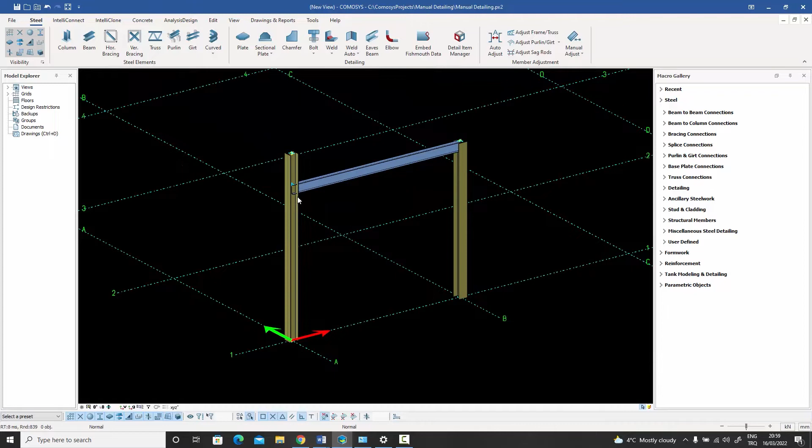So what I want to show in this video is how do we do manual detailing. So imagine I have a column over here and a beam approaching it, and I wanted a haunch connection over here, let's say. Now normally, obviously, since I have the beam to column haunch macro, I can just use that. But let's say I don't have that macro and I want to do the detailing manually myself.

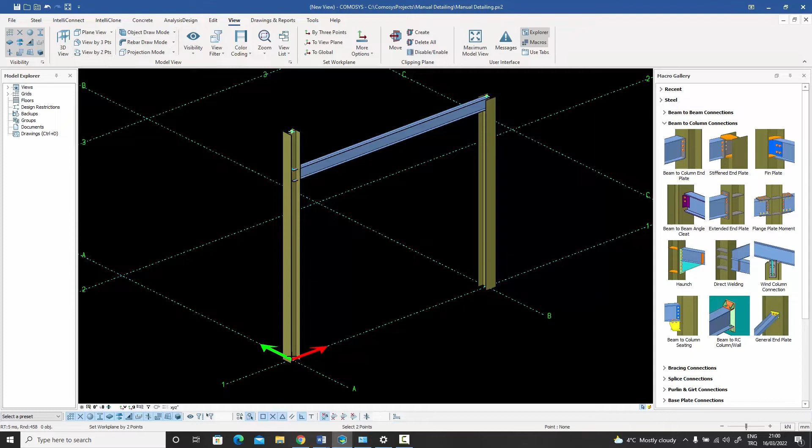Now in that case, what I would do is I would go to the view menu and I would go to the view by 2 points and I would create a view for myself. And the moment I do that, I'm looking at the elements from this side. A good practice is to immediately press this V button so that my work plane comes to this view and I know where my X and Y axes are. I can zoom in a bit and now I can start creating my plates.

So there'll be an end plate over here. I know for the haunch, it's going to extend some amount to the downside, and it's probably going to extend a bit to the upside as well. So I can go to my steel menu and I can look for my sectional plate command over here. I can press that and it asks me to select a plate, but I don't want to do that. So I'll right click, I'll just select 2 points and I want to select this point over here and this point over here, and then immediately a sectional plate is created. Let me right click twice to get out of the command.

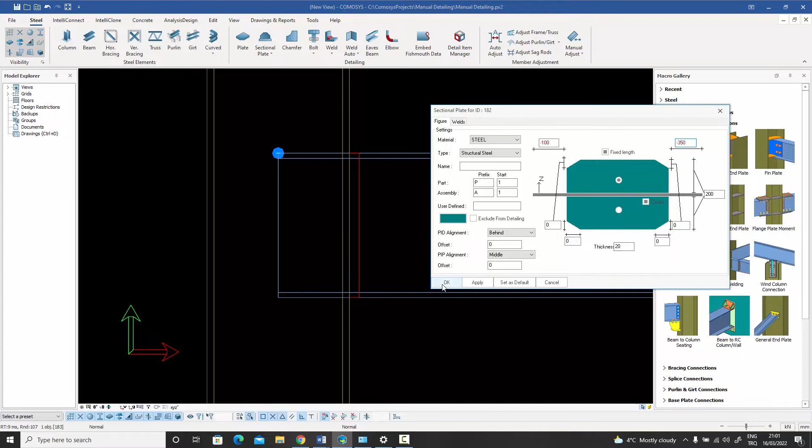Now I can select this plate and press Ctrl W to get it to the alignment which I want, and then I can double click on it and a dialog box opens up. This is the end extension and this is the start extension. So on the start I want an extension of -100. Maybe I want to put a bolt up here, and at the end, which is this point, I want an extension of minus, let's call it 350, right? And okay, so immediately the sectional plate command gives me an extension upwards of 100 millimeters and downwards of 350 millimeters.

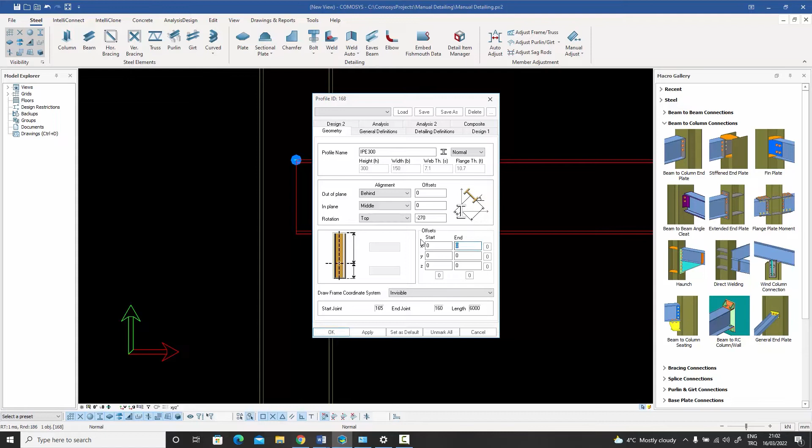The next thing I want to do is I want to pull back this beam so that it finishes at this point. So I can just measure what this distance is from here to here, and it's the next distance of 165 millimeters. So what I can do is I can just double click on it. This is the end point, so I can say minus 165 at that point and press OK, and the beam is pulled back.

Now I want my flange plate, which is an inclined plate, something like this, and I want the flange plate to start at about 30 millimeters above this point, somewhere over here, and go in an inclined way to somewhere over here, which the definition of this point would be, say, 500 millimeters from this point.

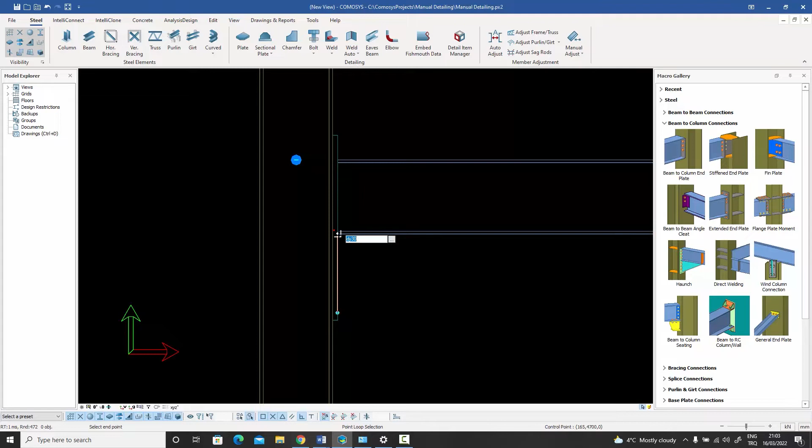So I can go back to my sectional plate command again and right click because I want to select points, and I can hover over this point, and using direct entry method I can just say dy 30, and the first point is selected without having the need to actually create the point. And for the second point, I need to hover over this point and press enter again and say dx this time and say 500, and I press enter, and immediately my sectional plate is created. I can right click twice to get out of the command. I can select this plate and press Ctrl W shortcut to get the alignment which I want.

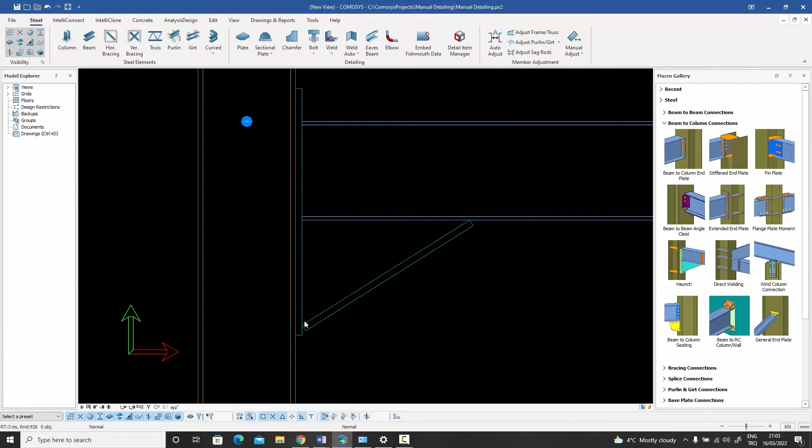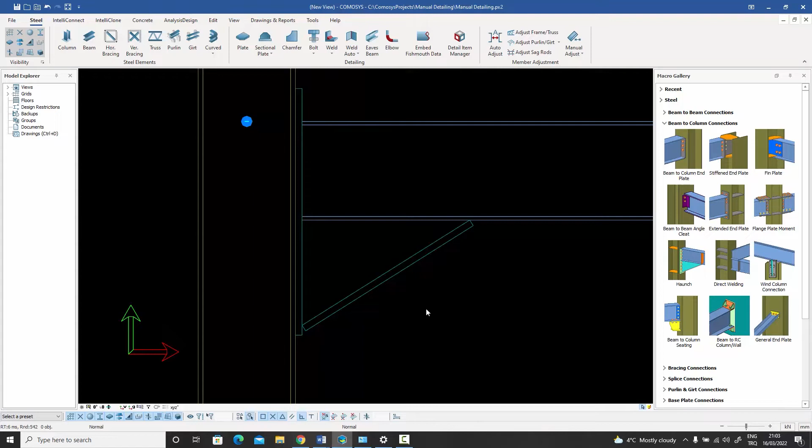And now I'm ready to enter my contour plate, which is a triangular plate over here. So for these two plates, I use the sectional plate command, but for the triangular plate, I will simply use the contour plate command over here. So I just go like that, and back. The plate's been created. We don't see it because of the mode we are in, so I can just change my draw mode to the solid draw mode, and I can now see the plates. They're all created in the center of the view, so they're perfectly aligned right now.

What about the depths of these two plates? How much are they going in the Z direction right now? So I know I want this plate and this plate to maybe be the same as the beam's flange, for example. So let me double click on the beam's flange and see that the width of the flange is 150. So if I double click on that, I can make this variable 150. And now I know that the depth of this plate is 150, and I can do the same for this one.

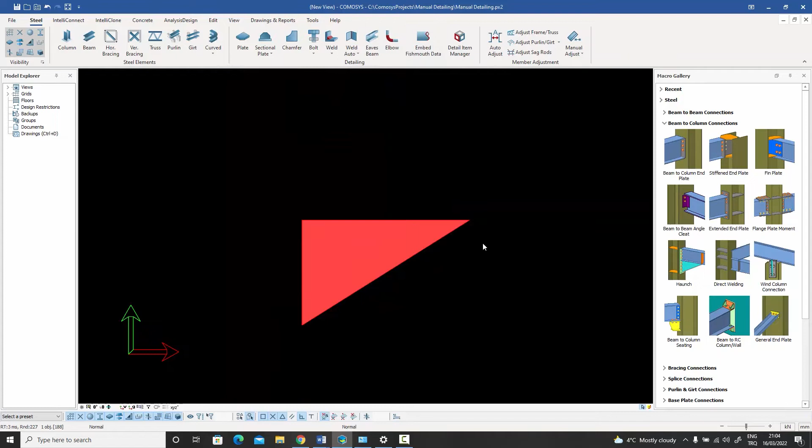I could have done a multiple selection and done both of them at the same time. Now I want to have 3 chamfers over here for this triangular web plate. So what I do is I just select it and I say show only, and I press the Alt key and I do a window selection so I can select all the chamfers, press enter and go to the appropriate chamfer type and give a number, press apply, and my chamfer is done.

I can right click and say show all once again, and the rest of the elements are on the screen once more. I now need the bolts at the end over here. So let me go to the sectional bolt command over here. The normal bolt command would be used if you were looking at this from the front, facing it. But since I'm already in the sectional view, I'll prefer to use the sectional bolt command.

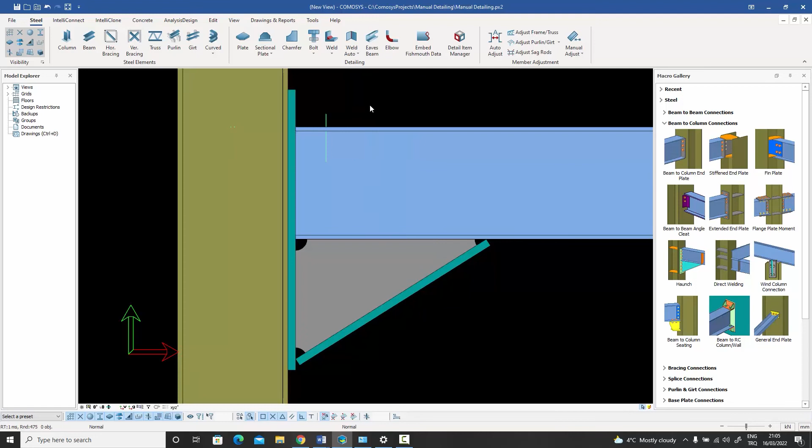And the bolt is between this plate and the column. So I select the two, right click, and now it asks me for the origin of the bolt coordinate system, which is over here. I can have it anywhere I want, but let me just keep it over here. And then it asks me for an X direction. So I give it this direction. Immediately it creates the bolts, but because the settings of the bolts are not appropriate right now, it's just created the bolts in a dummy way.

So I'll double click on the bolts, go to my positions, the Y positions. I know this is the X direction, but the problem was in the Y direction. So the Y positions need to be -30 and 60, -30 being the absolute coordinate and 60 being the relative one. And for the X one, because I know the origin is over here and I want my first bolt to be over here, I can say -50 and then 100. So let's see where that gets me. That gets me something like this. This first bolt at the top is -50 and the second one is 100 millimeters from there.

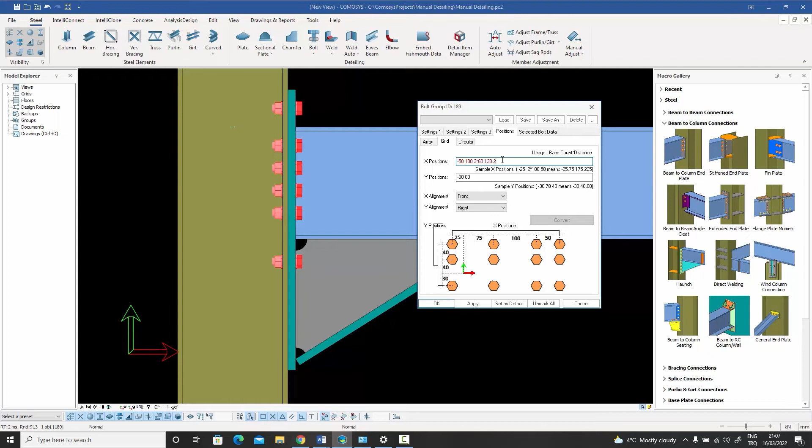And then after that, I can just say maybe 3 into 60 and see where that takes me. Okay, that's perfect. I can then jump 130, see where that takes me, and then do another maybe 2 into 75 to get my remaining bolts. And I can press cancel to get out of it. If I wanted to change the diameter, I could just go to the settings section and change my diameter and assembly settings from here, but I don't want to do that.

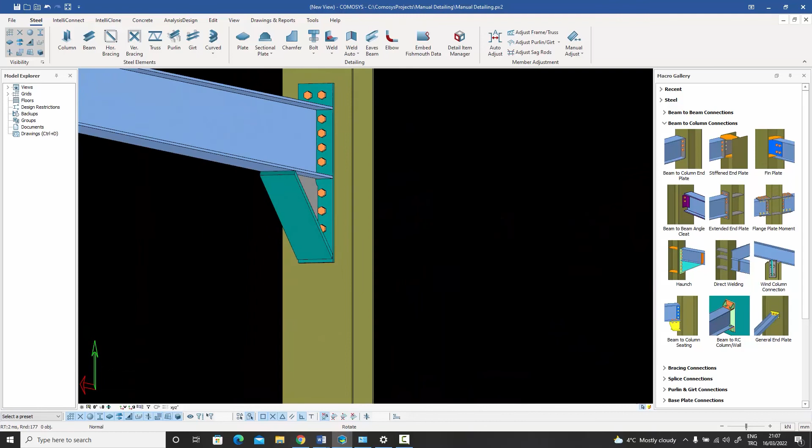Let's just rotate the view a bit and see what we've achieved. Okay, there we go. We can see that these sectional plates are exactly the width of the beam over here, which was 150, as is this end plate. And with a few clicks, I have managed to create my Haunch connection. Now I want to just create a little stiffener plate over here as well. So I can start creating a contour plate. I can go like that. I can go like that.

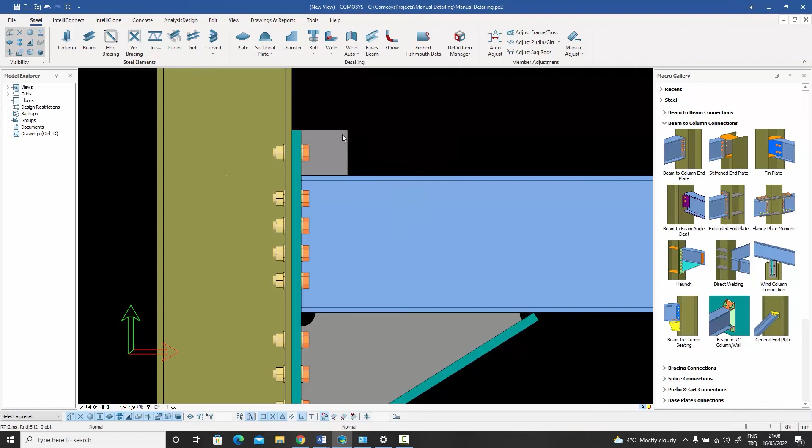And now I can hover over this point and say something like dx 100 maybe, right? And then I can just come down to this point because the perpendicular snap is there, and I can finish it off. My plate is ready. I can press the Alt key, press enter for the chamfer. If I had the handles on, I could have done it through the handles as well. So I can just go in there and say maybe 25, 25.

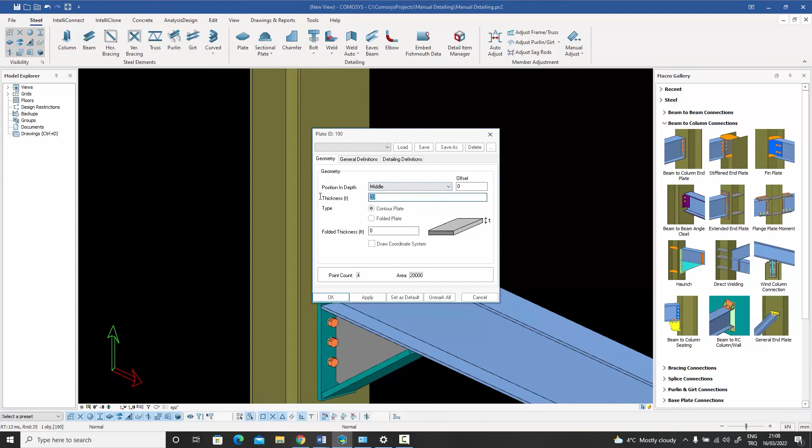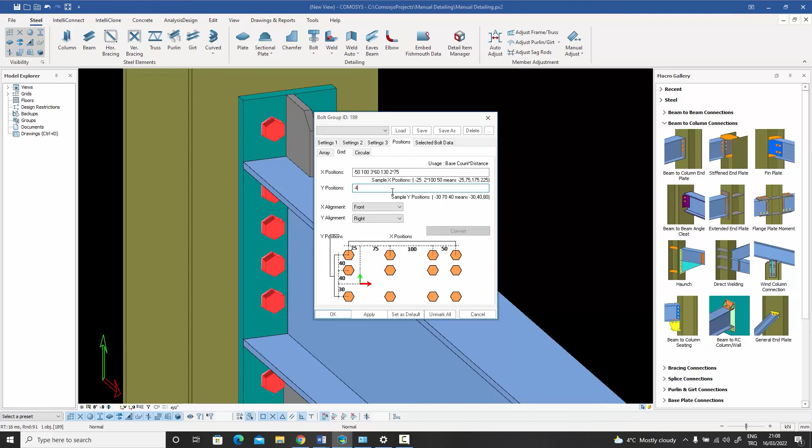That's it. And now my corner plate is also, the thickness is a bit too much for my liking. I'll convert that into 12 millimeters. And now I'm satisfied with it. I can go ahead to make the welds also. Maybe I don't like the distance between the bolts over here. Maybe it's a bit too small. So I can double click on them and, instead of giving it -30 to 60, I can convert that into -40 to 80. So it's a bit more opened up, right?

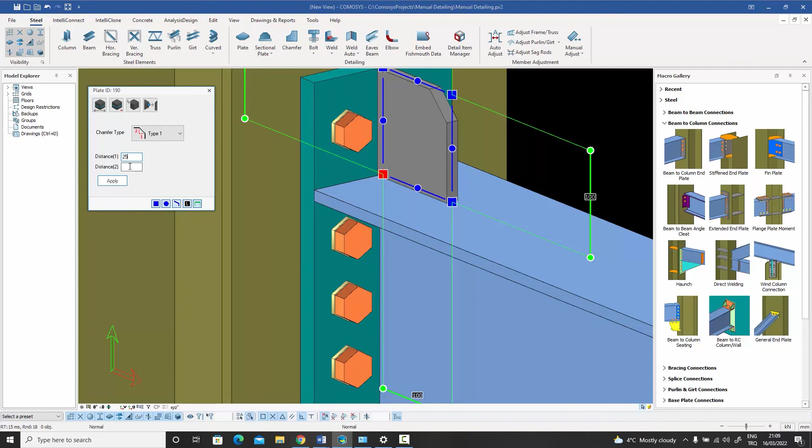I need a chamfer at this point as well. Let me turn on the chamfers. Now I can select this one and give it a chamfer using the handles this time so that it's easier. And there we go. Once again, I can press the 0 button over here to see it from the side, and I'm satisfied with it. All that's left over here is to create the welds, and that's pretty easy as well.

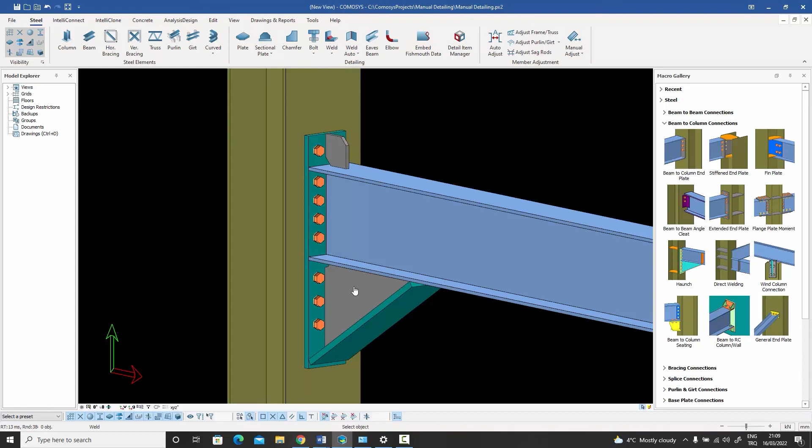All you need to do is go to the weld command, you select an edge, and then you select the plate you want to weld it to, and your weld has been created. So I won't go through all the welds, but this one has been created. At the moment it is only on that side, so all you need to do is double click on that, and instead of edge, choose all around. That's it. And now it's going all around.

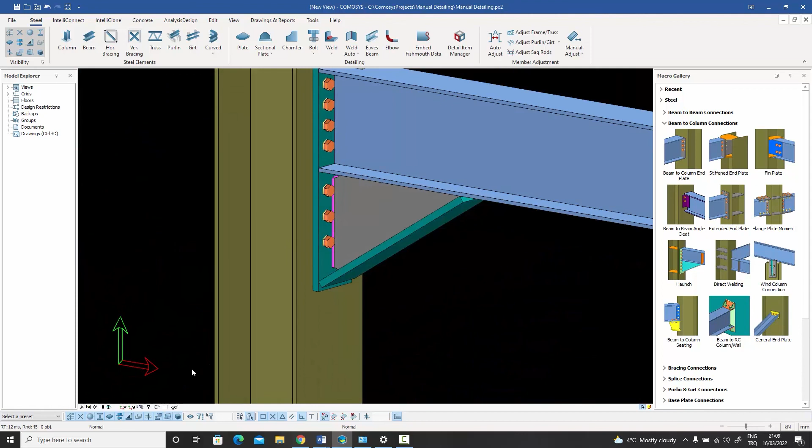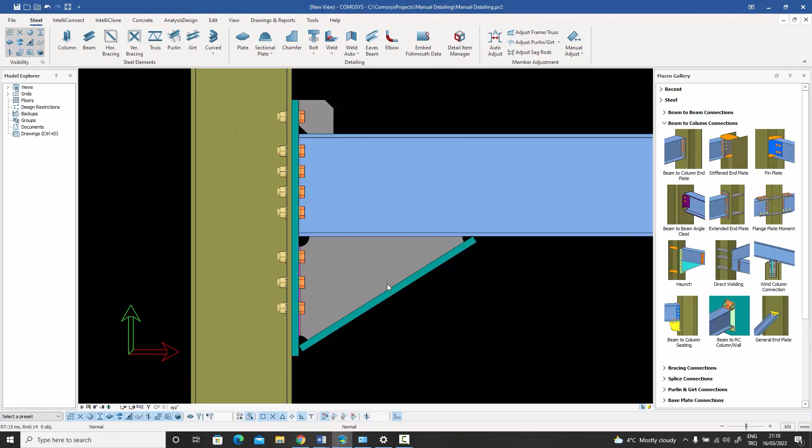So with a few simple steps, we've managed to create a Haunch connection without the need of having a Haunch macro. And the next thing we can do is easily put this in the form of a user-defined macro, and then whenever a similar situation occurs, we can use this macro. So the purpose was to be able to do manual detailing. In steel structures, you will do most of the job using the available macros. That's a given. But in any complicated job, there will be some detailing left where you will be forced to do manual detailing. So the purpose of this video was to show you how manual detailing is done, and I hope that's been useful.